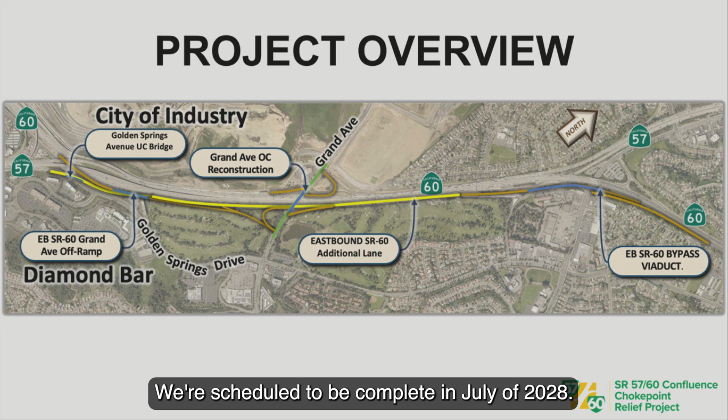I'll give a quick project update on the SR60. As a quick overview, it is a 5-year project. We are 2 years in, scheduled to be complete in July of 2028. I'm going to categorize this project as 4 bridges.

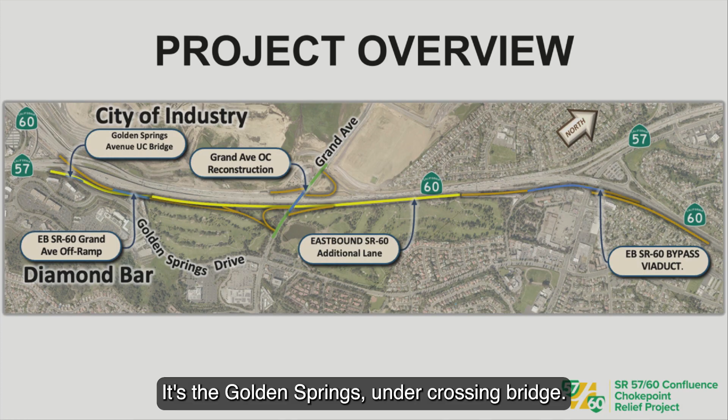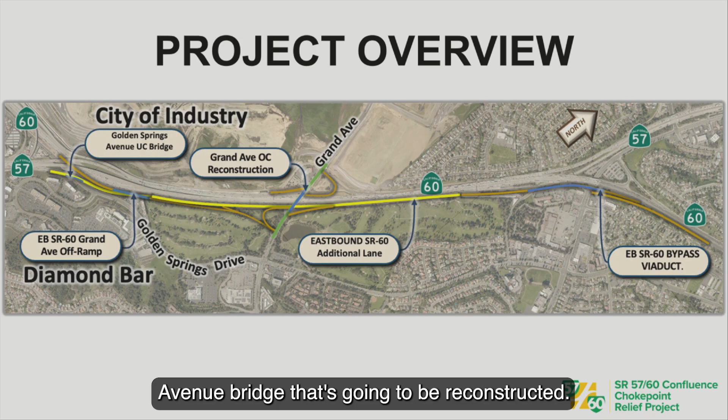The first bridge, which is nearly complete, is just outside this city hall—it's the Golden Springs undercrossing bridge. To the north is the new bridge that will take commuters from the 60 off to Grand Avenue to avoid merging with traffic. The third bridge is the new Grand Avenue bridge that's going to be reconstructed.

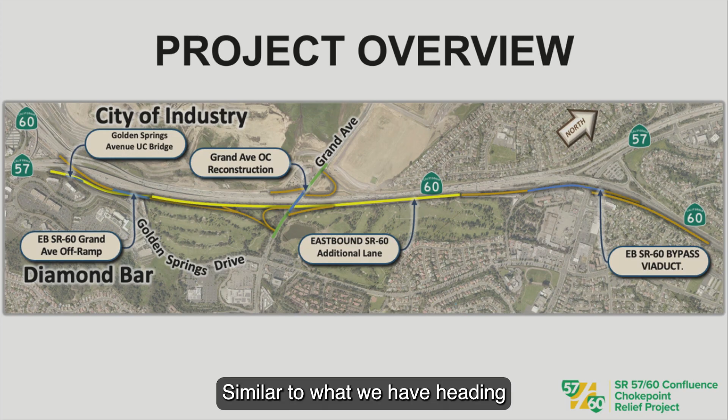And lastly, to the east will be the eastbound SR60 bypass viaduct. That bridge will be for commuters who are getting onto the freeway from Grand Avenue. If they can't make it to the 60 all the way up to the left, they can take the viaduct bridge to go to the 60, similar to what we have heading towards Brea and Pomona, and City of Industry.

So current progress for Golden Springs Drive: utilities have been relocated, 3,000 feet of sanitary sewer line has been installed, and when you drive out there, you can see where it's been installed. Other water lines and miscellaneous frontier communications have also been relocated.

The pour went great. We had several Caltrans staff attend—it's one of the recent bridge pours we've done, so everybody wanted to see how we did it. In the coming days, you'll see a bunch of Caltrans folks out there as we're stressing the bridge, basically stretching the steel so it compresses the bridge and allows us to put weight on it.

In the coming months, we're going to complete the bridge, which should be done by the end of this month, and do remaining civil work, which is roadway work.

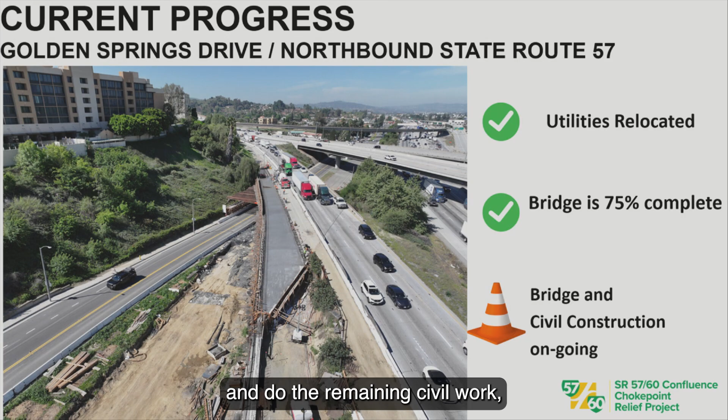The eastbound SR60 Grand Avenue off-ramp bridge, as a reminder, once complete, will take motorists from the 60 off to Grand Avenue. You will still be able to go on both freeways, the confluence, and get off on Grand, but this is much easier—you just get on the bridge and it takes you over Grand Avenue.

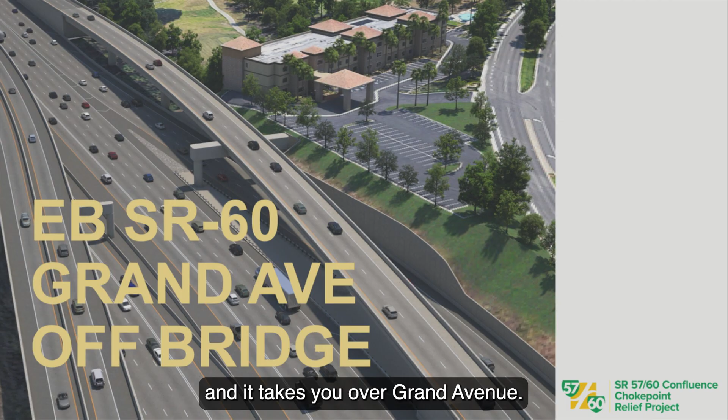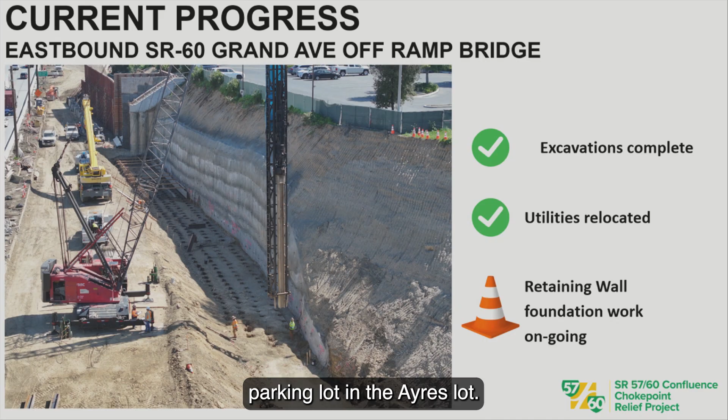We've been able to cut the slope outside of the Ayres parking lot. We're supporting the soil, and what you see there is a big rig driving piles 30 feet into the ground—that's the foundation for the retaining wall. Further up the picture, you see we're starting forming the footing. In the coming week, you're going to see tall rebar sticking out of that floor, and it's going to be the retaining wall that supports that parking lot in the Ayres lot.

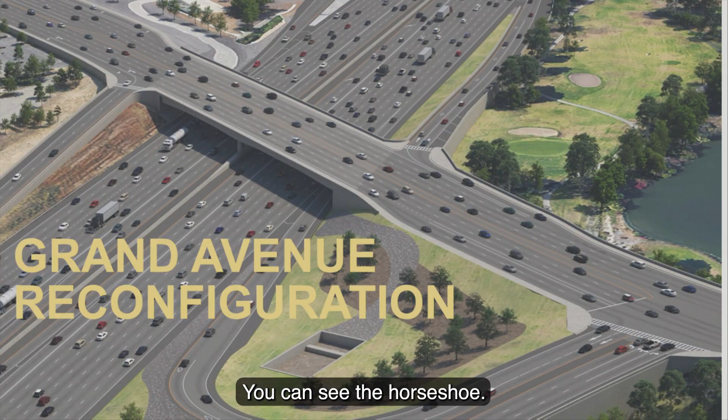Grand Avenue reconfiguration—that's a schematic of what it looks like in the future. You can see the horseshoe, that will be the new on-ramp to the freeway. A lot of the grading has been done, and Edison just completed the relocations. This coming month in May, we will be doing a large traffic shift and closure, which I'm going to go into more detail on, but it's good that we've been able to relocate the utilities.

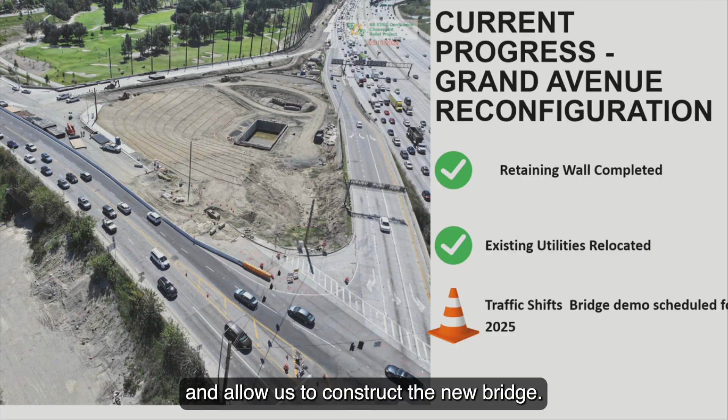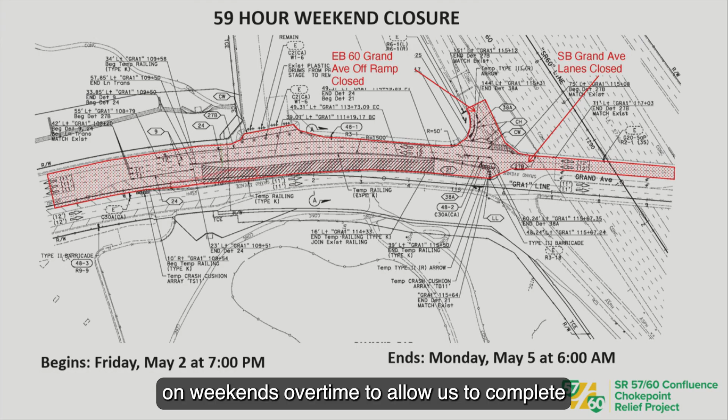In the coming months, we're going to be shifting traffic back and forth to allow us to shift traffic towards the west, demo the existing bridge, and construct the new bridge. This upcoming weekend closure will start on May 2nd at 7 p.m. and end Monday, May 5th at 6 a.m. It's a 59-hour closure, so we will be working around the clock on weekends, overtime, to complete this work.

The shaded area in red shows the construction zone. The off-ramp to Grand Avenue will be closed for the entire weekend, as well as southbound traffic from City of Industry heading into Diamond Bar. Northbound traffic, shown not highlighted in the picture, will be open. Pedestrian access will be open during the weekend closure, but it's going to be crews stacked on top of crews finishing the work—excavating, demoing, installing new pavement, and allowing the pavement to reach its strength.

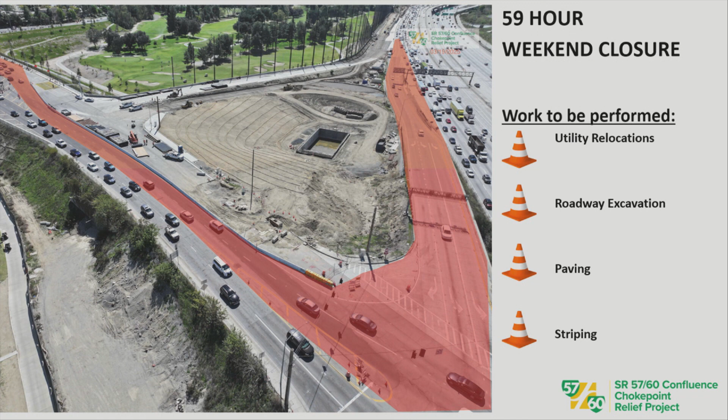In terms of detours, there will be 2 detours that motorists can follow. For the Grand Detour, it will be heading down to Valley Boulevard, to Temple, and down to Diamond Bar. For commuters on the freeway, it'll be getting off on Brea Canyon Road or the next exit, which is Diamond Bar Boulevard.

Community outreach—as always, we try to inform local residents by knocking door to door and posting on our social media sites about the closures. This is what we'll be doing in the coming weeks: putting up traffic message signs, as well as knocking door to door and letting people know we're closing for the weekend—it's just southbound traffic.